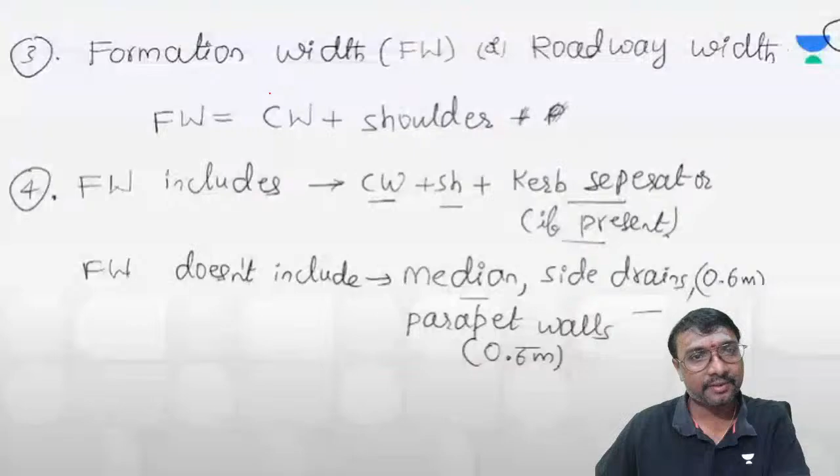So this quick revision of highway engineering part 1 we have done now. What have we done? The carriageway width, minimum width of carriageway, and the formation width, including which parameters it includes and which elements it does not. Also the formation width values for national and state highways. A few points regarding formation width we have written. That's it, up to that point we have noted.

Now this is lecture 2, quick revision of highway engineering, cross sectional elements part 2. How many points are over? 12 points are over in the cross sectional elements. Now the 13th point.

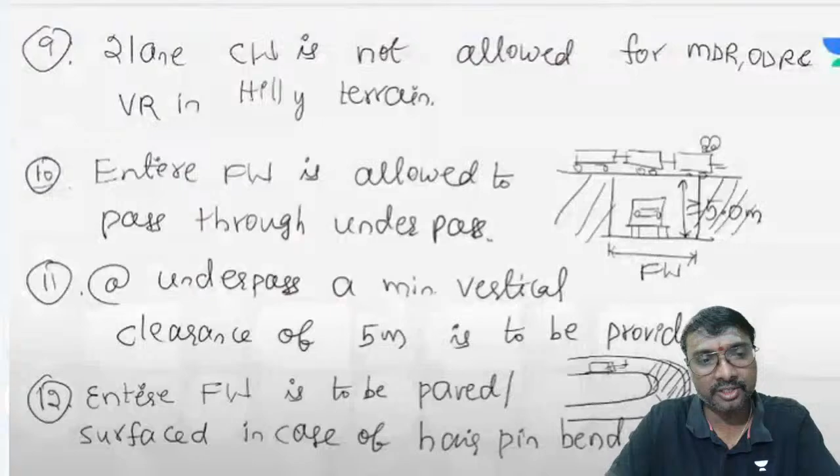Regarding the formation width, what have we mentioned? Underpass and all these things we have mentioned now. The entire formation width is to be paved or surfaced in case of hairpin bends.

Tell me, minimum spacing, what is it? What is the minimum spacing between hairpin bends? Tell me how much. Minimum spacing between which one? These hairpin bends, you can say, is it?

So what is that minimum spacing between the hairpin bends? Why do we have to maintain this spacing? If you do not maintain this spacing, what is the disadvantage? Tell me. All these hairpin bends will be together, right?

These hairpin bends are near each other, so can you expect your vehicle to take a turn here? It cannot take the turn. Immediately after taking one turn, one more turn is there, so it is very difficult for the vehicle. So we have to maintain spacing from this bend to this bend. Minimum how much do we have to maintain?

Minimum 60 meters we have to maintain, so that vehicles can take turns easily. Minimum spacing between the hairpin bends is greater than or equal to 60 meters. Got it now?

Now, what is another element? If the number of lanes are more than 2, is shoulder mandatory or not? Even if you provide shoulder or don't provide shoulder, it does not matter. Shoulder is not mandatory as per IRC. But if you want to provide it, you can provide, there is no issue.

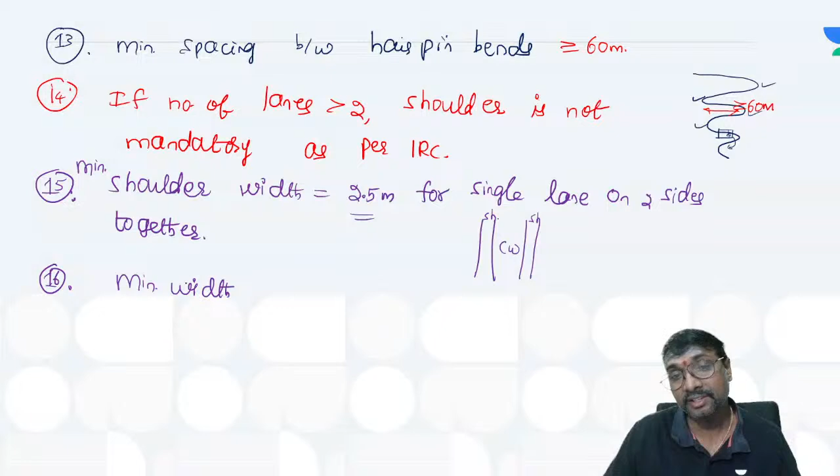In the rural area, this is your carriageway and this is your shoulder. In the urban area, what are we having? Verges. The purpose of verges is to accommodate signboards, signal columns, electric poles and all these things. So what is the minimum width of the verges?

Minimum width of verges will be 1 meter on each side. What is the meaning of 1 meter on each side? This is your verge on the left side and the right side is also a verge, and at the center is your carriageway of width W. On the verges you can keep electric poles and all these things.

Now here, if you are just observing, for stability purpose, what is it that we need to maintain? Some of the roads will be constructed in cutting, is it not? So like this we have to go for cutting and the road will be constructed in this manner. And at some places we will be going for embankment, filling of the soil, and constructing the road above that. So this embankment and this cutting both must be maintained with some slope.

Why? If you do not have any slope, if you are cutting them exactly vertically, there is a possibility that these portions may fall onto the valley portion, onto this depression. So which is better? Tell me. Is it better to provide some slope, or to provide the cutting vertically? It is better to provide some slope, right?

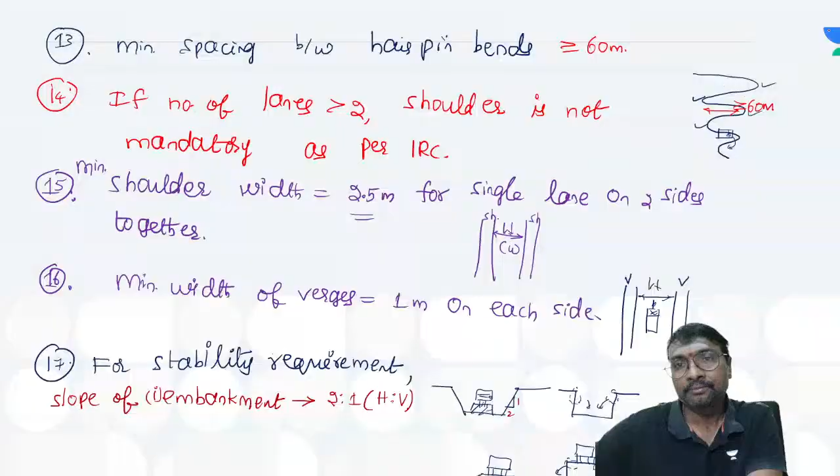This is the first slide, so I'll go to the next one. For cutting, what do we need to maintain? This is the slope of the embankment, and the second one is the slope of the cutting. How much is the slope of cutting? 1.5:1 we have to maintain, in case of ordinary soil or loose soil, normal soil you can say.

Yeah, Dibyajit, good morning.

And we have to increase the slope, almost vertical. What is the meaning of almost vertical? Is there any slope or no need of any slope? No need of any slope, in case of hard rock. Whenever it is very hard rock, even if you cut the rock like this, do you have any problem? No, it may not lose stability. If it is just rock only, you have to be careful, but there is no problem you will get for these.

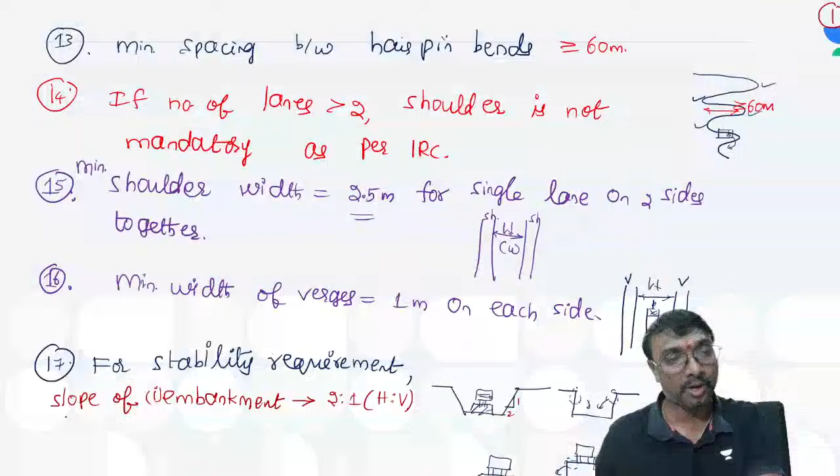Got it now? Now coming to this, the width of the median. A median will be there, yes or no? What is the purpose of the median? If you have this road, this is your median. Vehicles will be traveling like this. Whenever you provide this median, this is your normal road; here some vehicles are traveling in this direction, and some vehicles are traveling in this direction.

Samskruti Bharati Indian. Yeah, good morning.

So this is which one? Some vehicles will be traveling in these opposite directions, no? Yes or no? What do we need to do to avoid collision between them? We have to provide the median definitely, right? Yes. It is not grade separated.

Grade separator means what? What can you say? At different levels we are separating the traffic. So are you providing one lane at a higher elevation and the other lane at a lower elevation like that? No, not doing like that. This is just the traffic separator only. Okay.

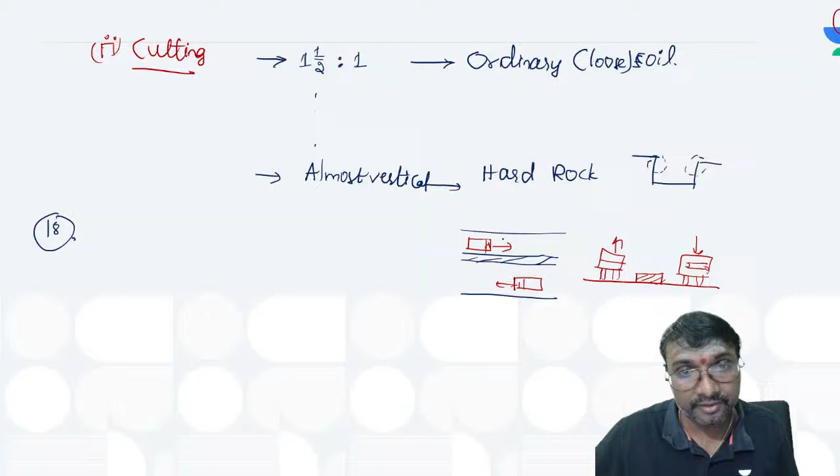So now here, what is the purpose of this median? The first and foremost purpose of this median is what? To avoid the head-to-head collision between them. And we are separating them during night time, so the glaring by headlights also will be avoided.

And sometimes we'll be growing trees on the median also, right? What is that process of growing trees on the median called? That is called arboriculture. Okay, so now here if you just observe the width of this median.

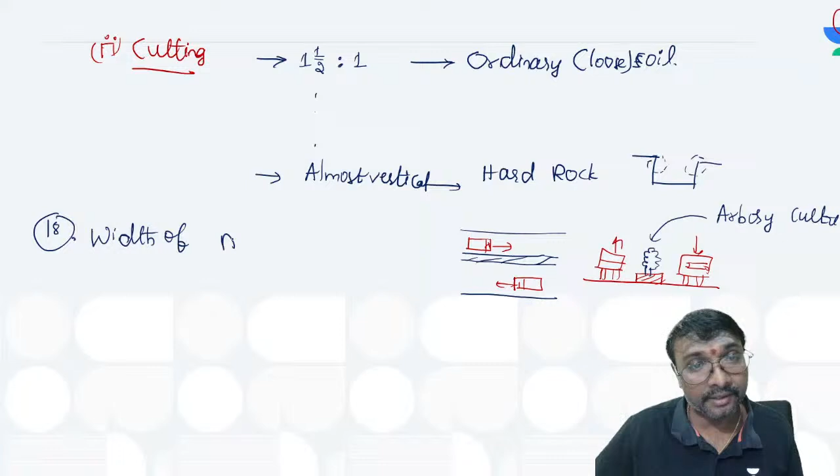So in case of urban area as well as rural area, we have to select the width of this median. What is the width of this median? That is equal to 1.2 meters, right? What is that 1.2 meters? It is the absolute minimum width. What is the meaning of this absolute minimum width? Tell me.

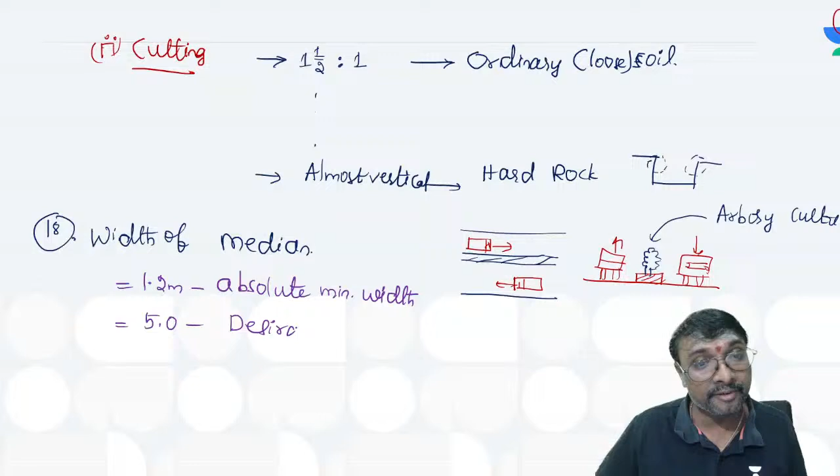So 5 meters will be the desirable minimum width, right? What is the meaning of this desirable minimum width? It is better we go for this desirable value. If the desirable value is not available, then only you go for the absolute minimum width. These are applicable for both urban as well as rural areas.

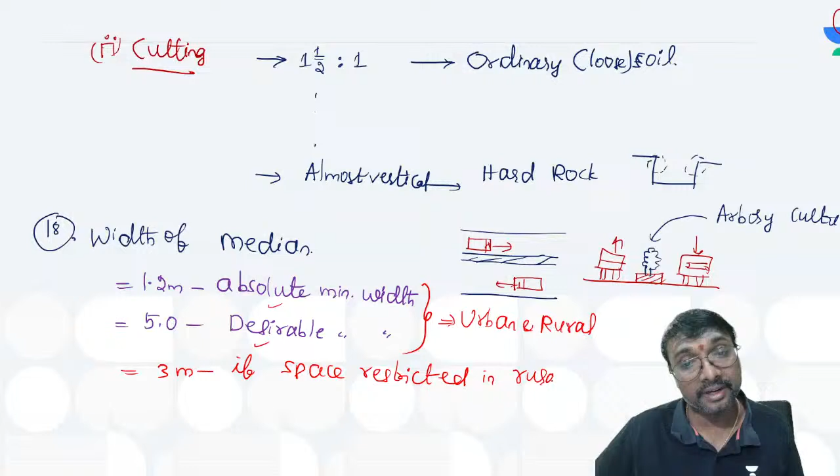And 3 meters is taken if space is restricted, right? If at all there is a space restriction. And space restricted in which areas? That is your rural areas, you can write like that. Got it now, everyone? Clear? So that is your width of this median.

Now, next one. Regarding the road, everything is over, right? Cycle track. So what is the width of this cycle track we have to go for? Tell me. Width of this cycle track will be n plus 1 meter, right? N plus 1 meter for this n lane cycle track.

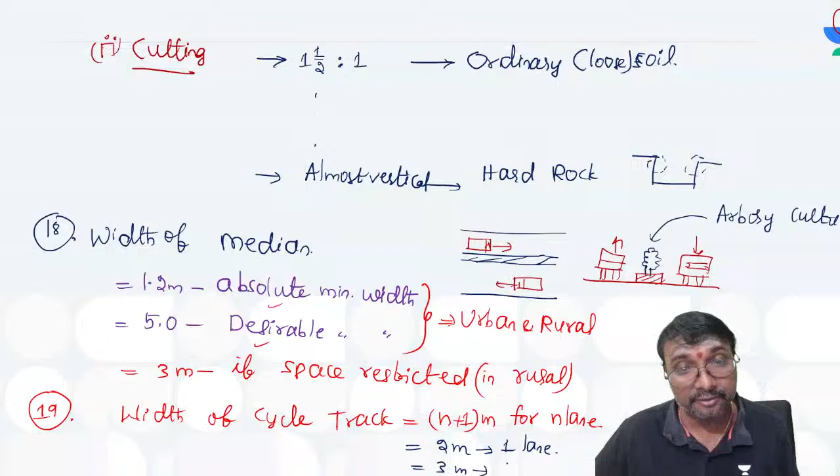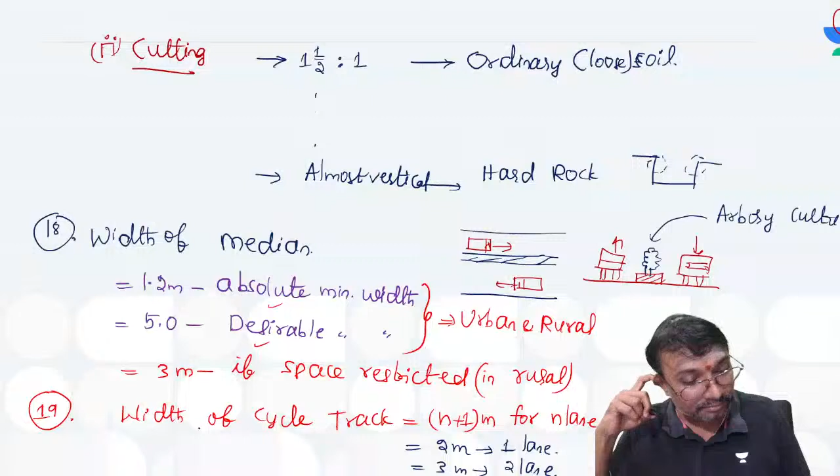So if it is for 2 lane, how much does it come to be? 2 meters for single lane, and 3 meters for 2 lane. Like that you will be having. Is that clear now? Got it? Now, shall I move to the next one?

So this is your 20th slide. What else will we have? Bus bay. The properties of this bus bay, how to provide this bus bay, dimensions of this bus bay. Where is the bus bay provided generally, in urban area or rural area? Only in urban area we will be providing this bus bay. So this is your main road, where vehicles are traveling.

Now, breakfast over for all of you or not? Everyone. Now, your bus bay will come. Yes, mine is over already. Chapati done. Yours?

Right. So this one, what is that you can say? Suppose this is one bus shelter, right?

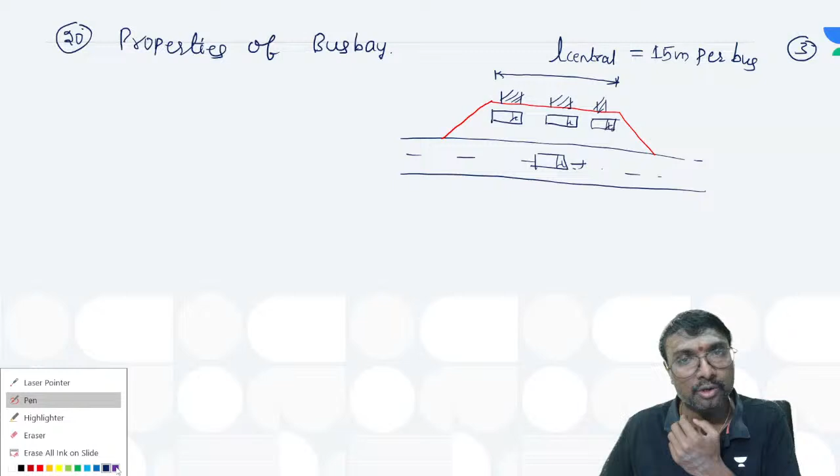So what is it you can say? This is your central portion length, L central. What is that L central? That is 15 meters per bus, right? If only one bus you want to stop, 15 meters. 2 buses, 30 meters. 3 buses, 45 meters, right? Like that we have to go.

And what slope do we have to maintain? This is the slope of the tapered portion. It is 1 in 6 to 1 in 8 for the tapered portion, right? 1 in 6 to 1 in 8 tapered slope, central portion is 15 meters. Based on that, you can calculate the other properties, right?

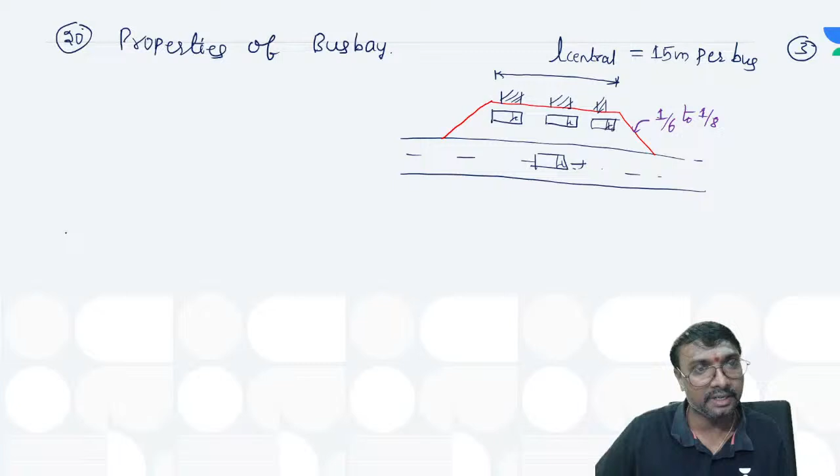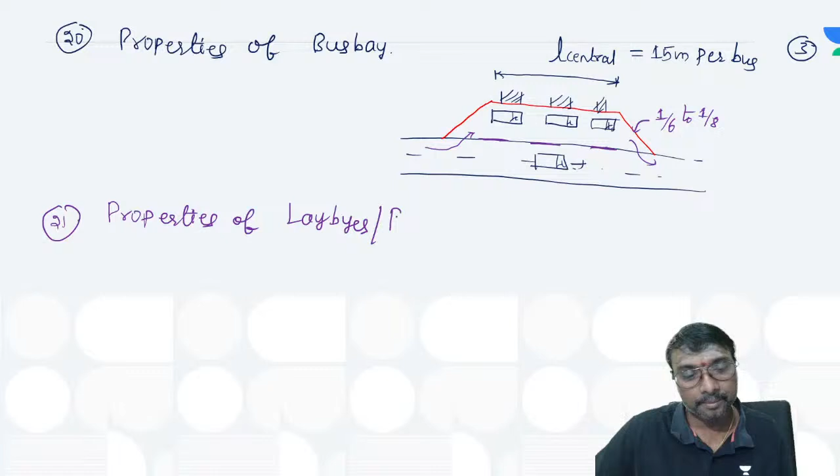Now, what are the other properties? Properties of these laybys or passing places. What is the purpose of these laybys or passing places? We can keep weigh bridges on these, we can keep checkposts on these, we can use it for emergency stopping, for long term stopping, even for 2 days, 3 days, night time taking rest. Service stations for these vehicles also we can keep. Many activities we can do with this, right?

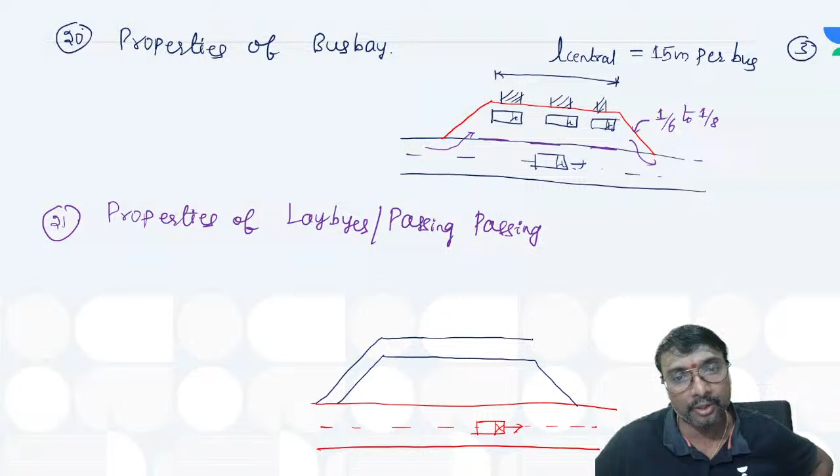Now what is this? This is your main road, right? Next one. This is your layby. It is better we separate this layby from the main road. Otherwise people will think that it is also road and they will enter onto this, right? People should not enter onto this daily, right?

So it is better we separate it, right? And what are the dimensions we have to go for? In case of urban area or rural area, for both it is required. So what is that L central? The central portion will be taken as 30 meters for both urban as well as rural roads.

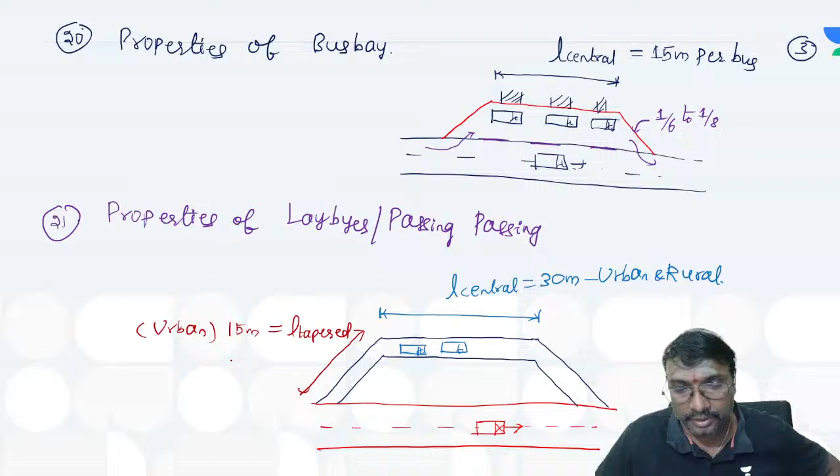So that vehicles can be stopped comfortably here, right? Now, what is the tapered portion length? Left side and right side both we take in the same manner. What is that L tapered we have to select? L tapered length will be 15 meters in case of urban roads, and 20 meters in case of rural roads. These are L tapered, that is your slope. Now what is the width we have to take?

So what is the width we have to take? That will be taken as 3 meters in case of this urban road. It's 3 meters in case of this urban road, it has to be provided. And in case of this rural road, how much will it be? 3.75 meters in case of this rural road, right, where more space is available.

There we have to go for higher dimensions, right? Where less space is available, we have to go for lesser dimensions, right? Obviously, right? Got it now? Right?

Laybys and overtaking zone? No, not same actually, Sanskriti. Laybys are for permanent stopping. Overtaking zones are for continuous overtaking, right? There is no stopping of the vehicle. Slow moving vehicles will be overtaken in the overtaking zone. If you just provide them like this, both look the same, no?

Both are not exactly the same, right? This extension, this widening portion, will be in contact with the main road only, but here there is no contact between this lay-by part and the main road. This is your main road. Both are absolutely different. This is your main road and this is only your lay-by. So here you are having some gap, right?

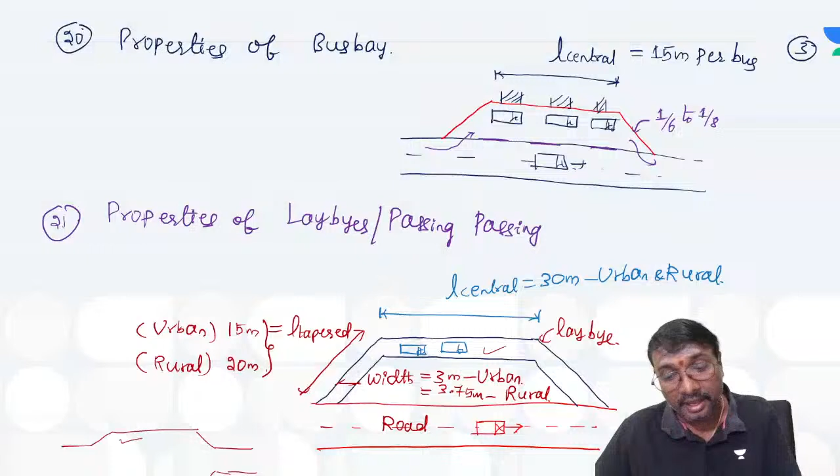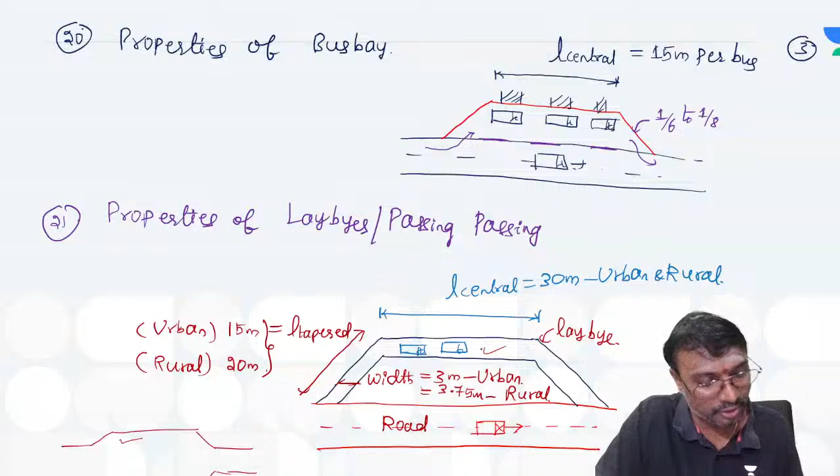And overtaking zone, what is the purpose? It is to allow the overtaking operations, right? And what is the purpose of this lay-by? It is to stop. So can both be same? Both can never be same, right? It's impossible. Is it understood now, Sanskriti? Is it clear? Your 21st and 22nd point under this cross section elements, right?

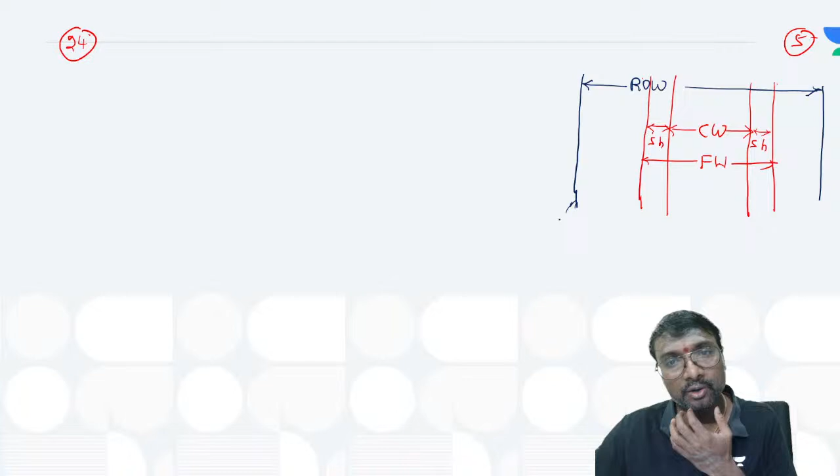What is this line called as? This is called as your road boundary, R/B, you can say. Road boundary, or road land boundary, you can say.

Next, what is another one? Even though we are acquiring, so here what is that right of way? Right of way is nothing but your formation width plus road margin. Left side some margin will be there, and right side also some margin will be there. Formation width plus road margins, what is that called as? Right of way.

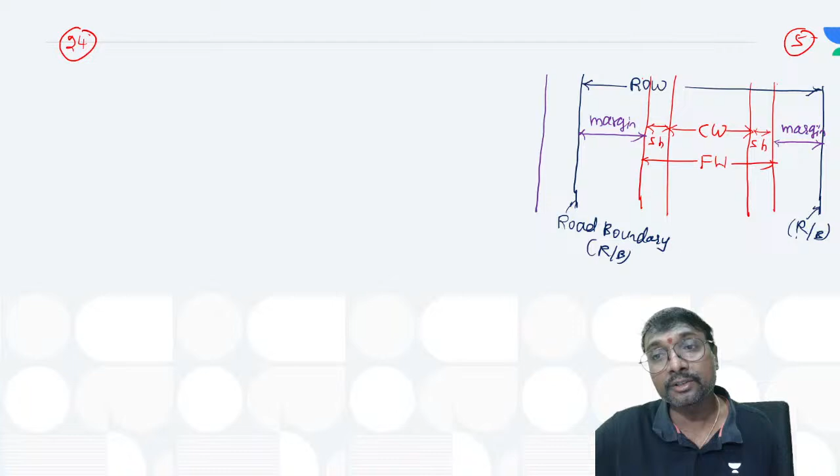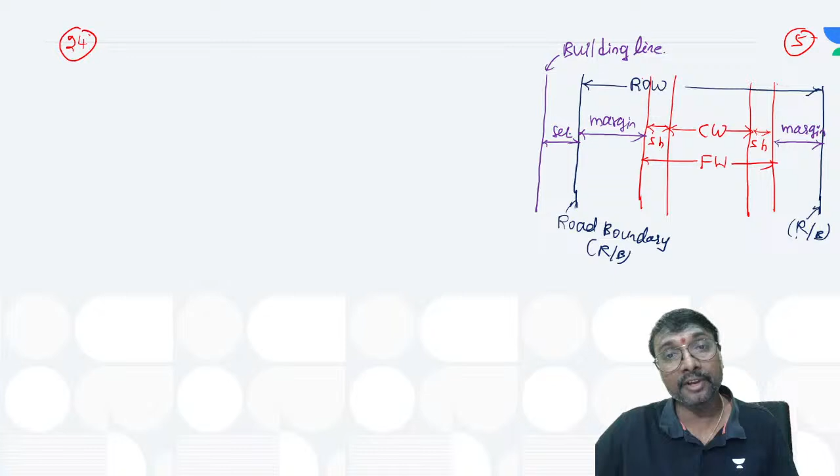And from this road boundary to the buildings, we want to start construction of these buildings. So now immediately we have to maintain some setback here, and right side also we have to maintain some setback. This setback we have to maintain after this margin, and that is your building line, BL.

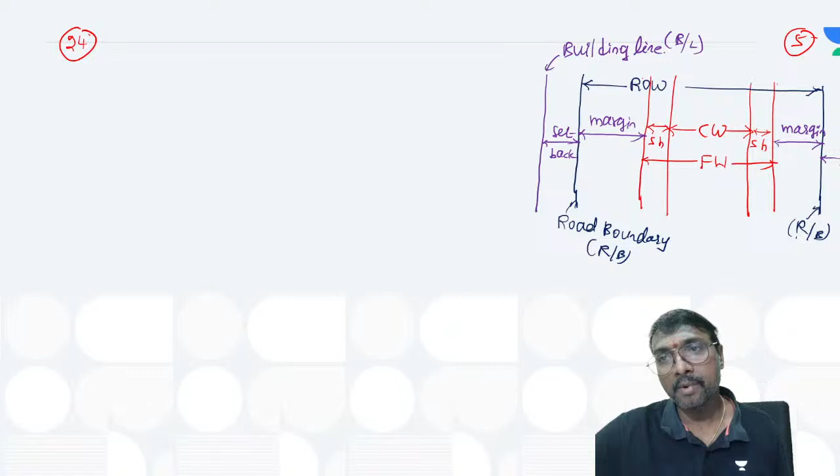But what is allowed up to this building line? Tell me. Up to this building line, only temporary structures are allowed. Beyond this building line, only permanent structures are allowed, if you just observe.

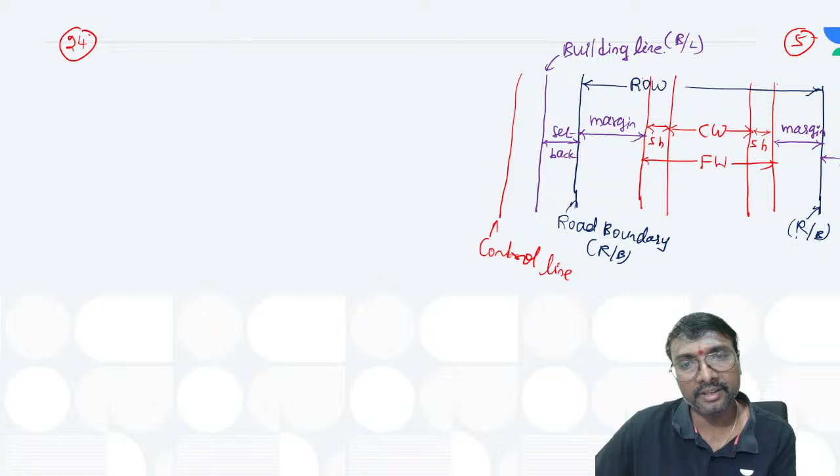Agricultural activities are allowed beyond the control line. If you observe, this side is your control line. We can have control up to this point so that any expansion in the future means this land can be acquired easily. This line you consider as the control line.

Clear? Now coming to this, what is this value? Formation width values we have already seen, carriageway width values we have already seen, shoulder width values we have already seen. Right of way or land width we did not see yet. What is the maximum value of formation width?

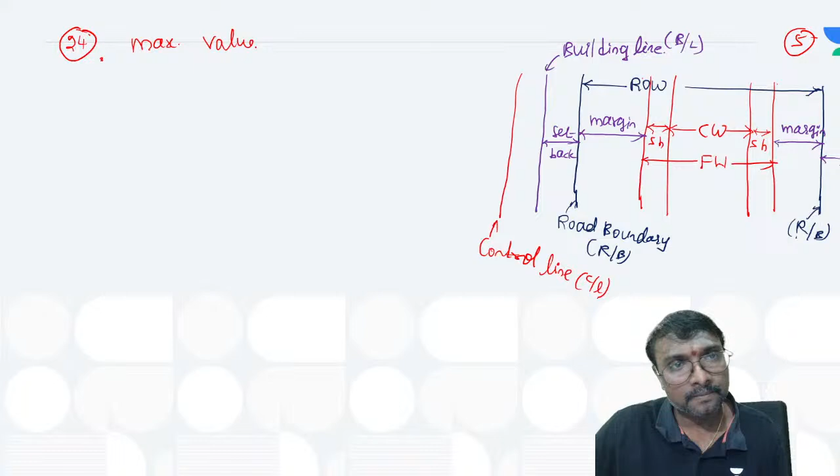Maximum value of formation width is equal to 12 meters, for which one? This is for plain terrain, in a plain and rolling terrain, for national highway and state highway. These questions confuse many people. That is your formation width.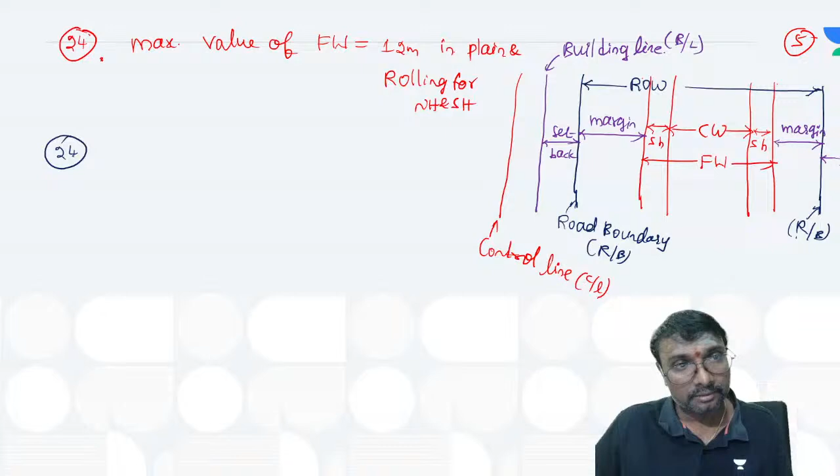This is the 25th point. What is it? Maximum distance between the building lines. From this building line to that building line, how much distance?

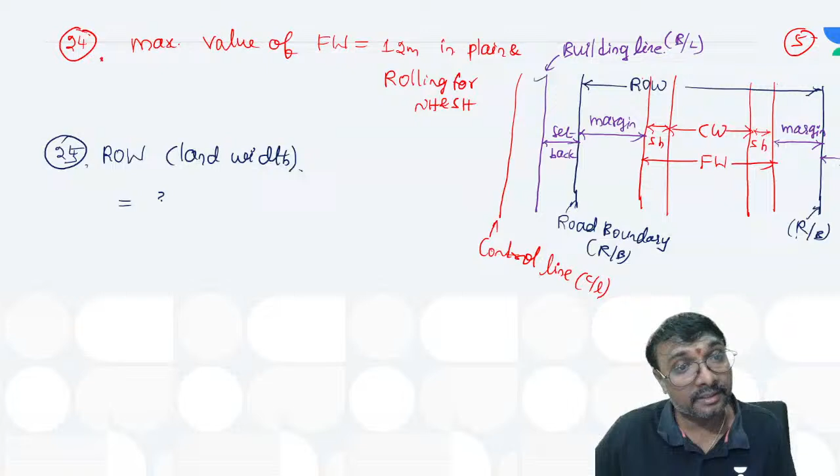Okay, shall I go for right of way or land width first? Right of way or land width range is 30 meters to 60 meters, with 45 meters as the normal value. Normally we go for 45 meters.

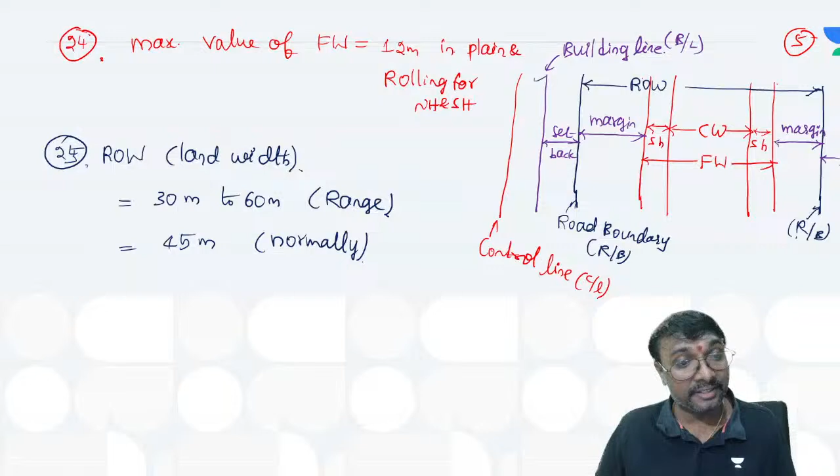These values are applicable for plain and rolling terrain, plus national highway or state highway. Remember, this is only for these roads. Now tell me, what is the maximum distance between the building lines?

So carriageway we know, shoulder we know, formation width values we know, right of way or land width values also we know. Then building lines maximum distance will be how much? Maximum we have to maintain 80 meters.

Correct. Now tell me, maximum distance between control lines? The maximum distance between control lines is 150 meters. You have to be careful about this.

150, not 120 meters, you have to be careful. 150 or 120, which one is correct? 150 meters is only correct. There is no 120 meters value. So 80 meters for building lines, and 150 meters for control lines. Clear, everyone?